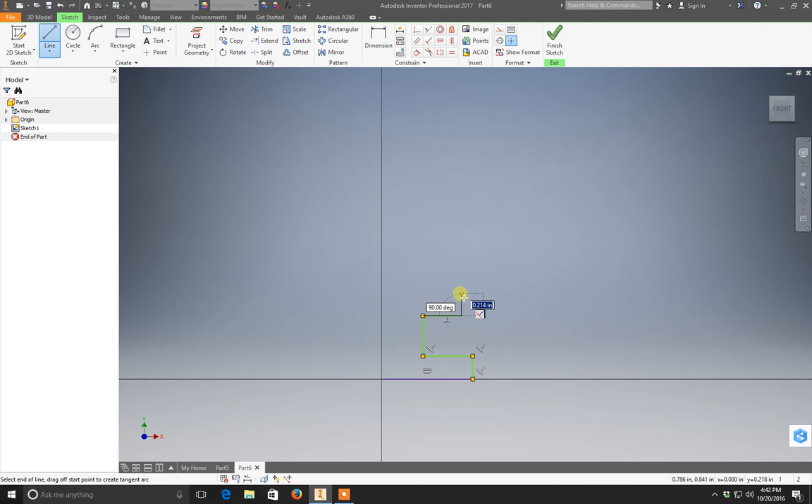So it looks something like that, and then I connect it like that, so I have a complete profile. I want this line to be a center line, so I clicked on it, and then I come up here and click on center line. Now that's a center line.

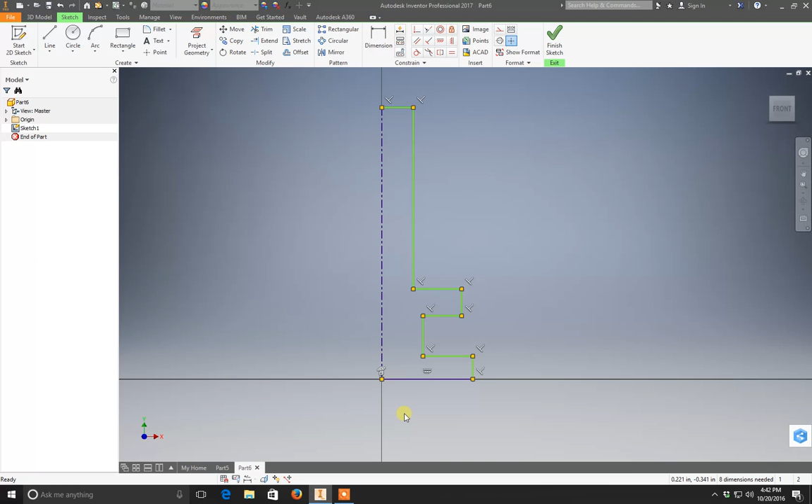Let's click F8 and look at the constraints we have. Alright, so everything is perpendicular, and that's what we want. This line is horizontal, that's perfect. Okay, everything looks good for now. Let's get rid of that—not that one, there we go.

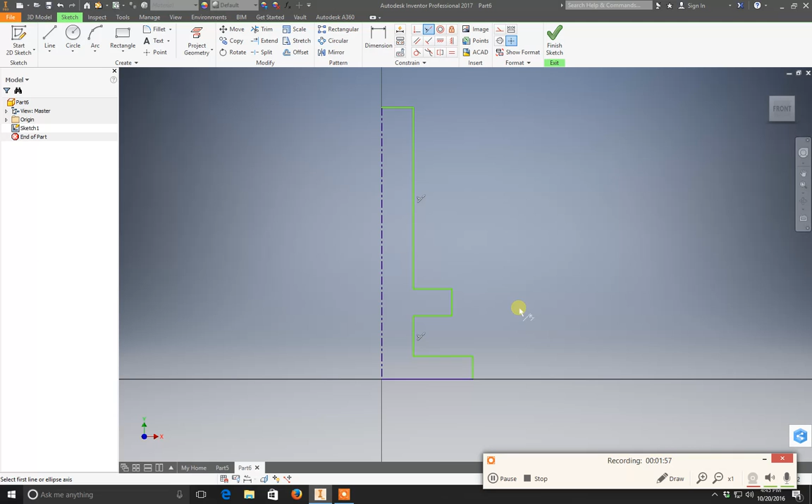Alright, and we will start adding some constraints. I think the only constraint we can really add right here is we want these two lines to be collinear with each other. So we click on this part and this part, and now they are collinear, or even with each other.

And I believe from here we just dimension it. So dimension on this line is 0.2. From here to here is 0.3—excuse me, this is supposed to be 0.2. So I just double click on that, 0.2. Okay, click on dimension again, this one is also 0.2.

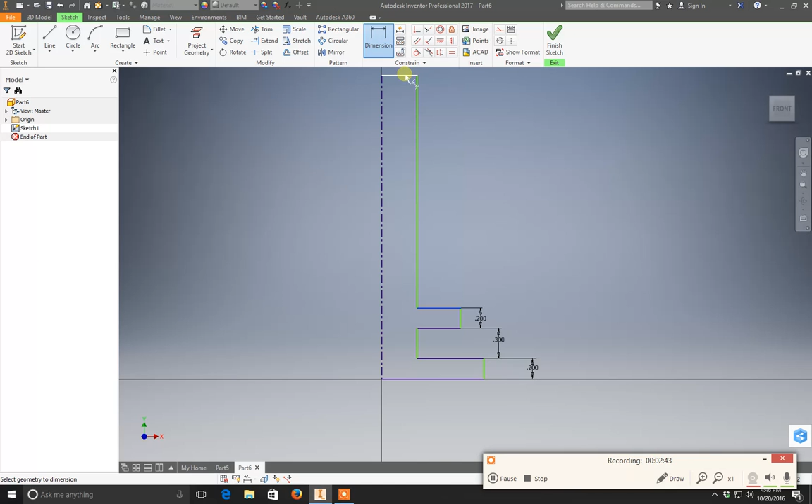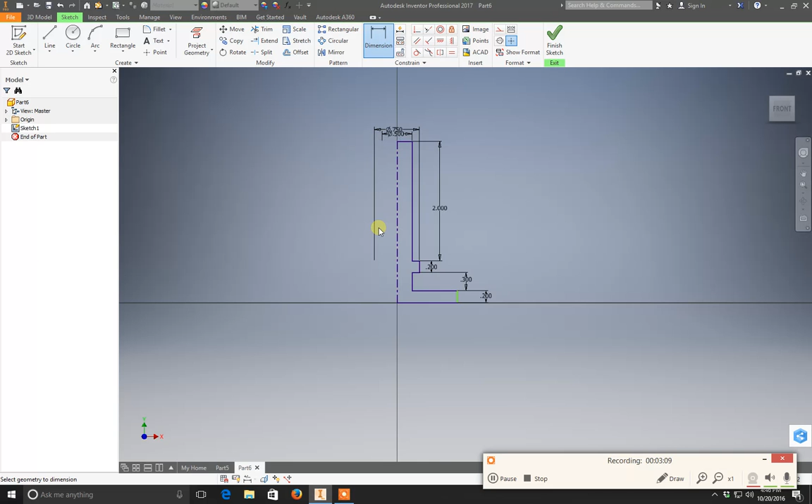And from here to here is 2 inches. This radius, or this diameter here, since I have the center line in it, gives me an actual diameter instead, so the diameter of that is 0.5. Diameter of this line is 0.75. And I hope Randy doesn't get on my case for bad dimensioning practices. And then this one is 1 inch.

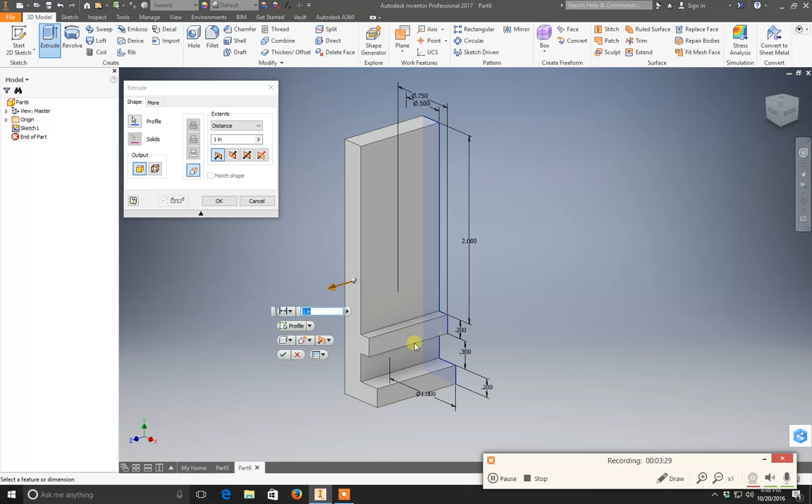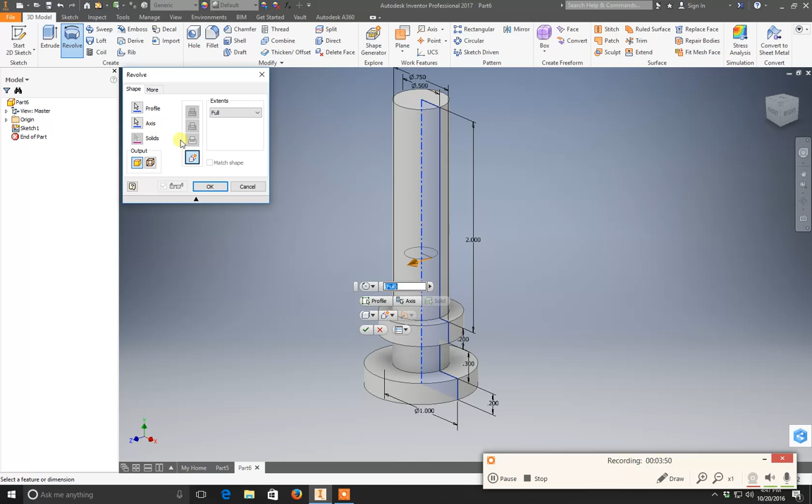Okay, and that is it. We'll say finish sketch. So now instead of clicking extrude—obviously if we click extrude it looks something like that, and that's not what we want—we click on revolve, and it automatically found what we wanted. We could have changed it to do some angle, like only 90 degrees, but we want it to be full, so revolve it all the way, and that's it.

We say OK, and now the part looks the same as the other one, except we need to draw that slit in it. I'll just do that real quick, and I'll hurry through this one since I already demoed how to draw that.

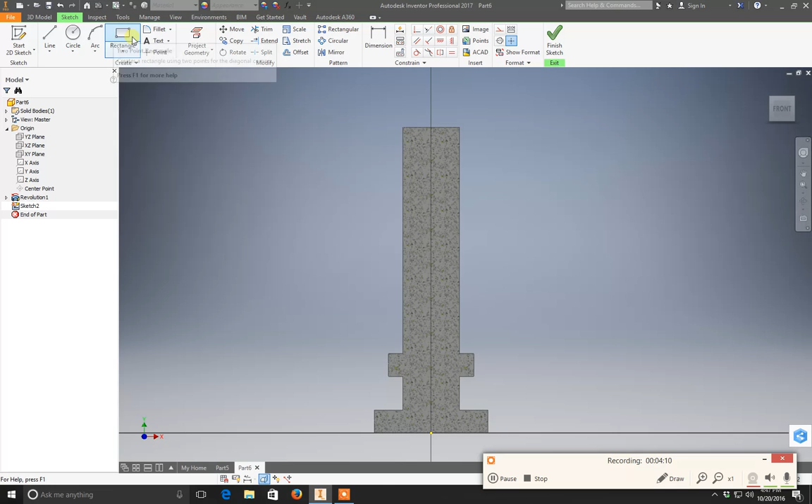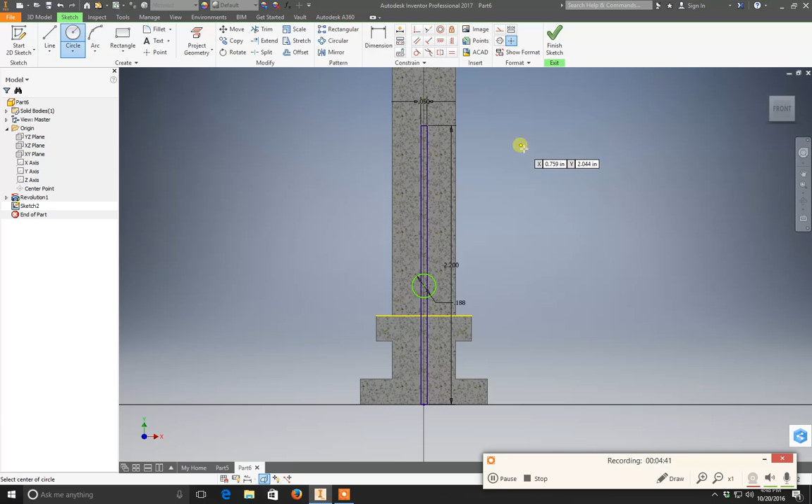That is 2.2. Okay, we'll use a coincident constraint right here. Alrighty, and then we'll need to project this line, and then put in a circle. That is 3/16. Get rid of that thing.

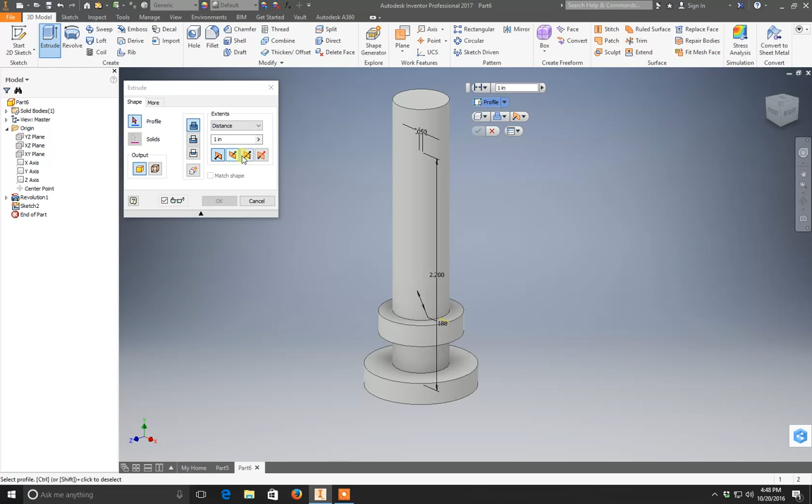We have two more dimensions needed, so we'll make this vertical with this point right here, and we'll make it tangent to that line. Perfect. I'll finish sketch. Extrude—we want it to be symmetrical and cut it through all. Click on that line, click on that circle, and there we go.

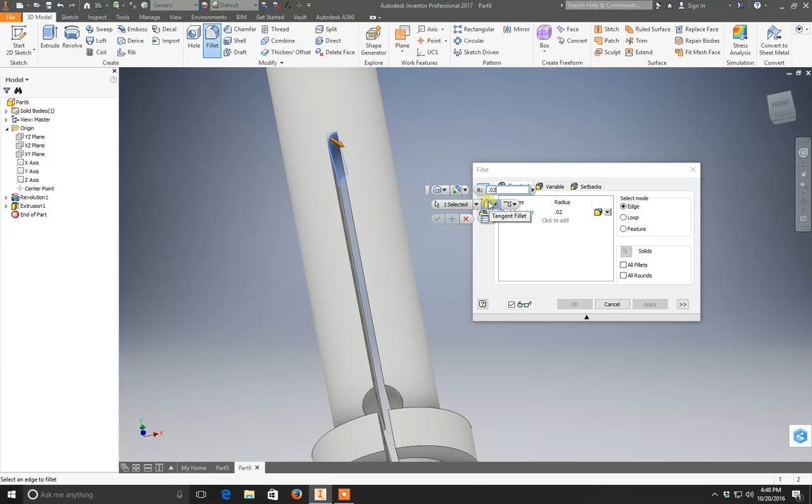Fillet these two lines real quick—oh, not that one, let's try again. Fillet, right here. We'll change that to 0.05—sorry, 0.025. And click on that line there. We can see it, there we go. Click OK.

And now that part's finished. So this is the extruded part, this is the revolved part. They're both the same, just two different ways to skin the same cat.